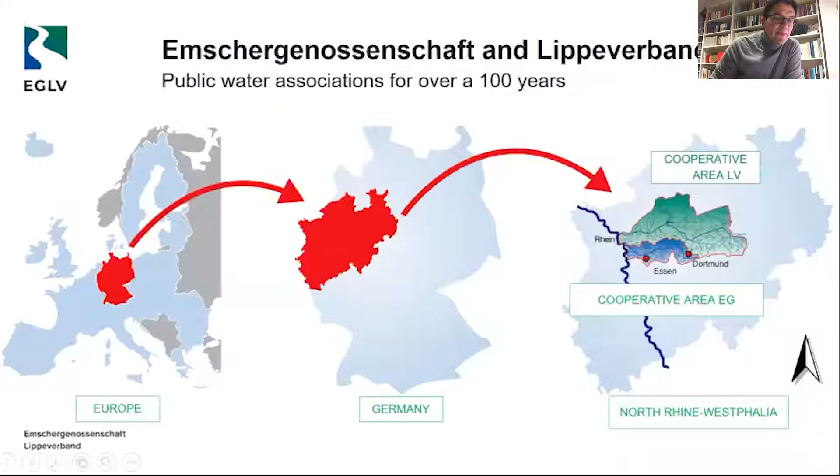If you put up the next slide, please. Here you see the public water boards in North Rhine-Westphalia, where industrial companies, mining companies, and the cities are members, which is quite unusual. Next slide, here you see our catchment area.

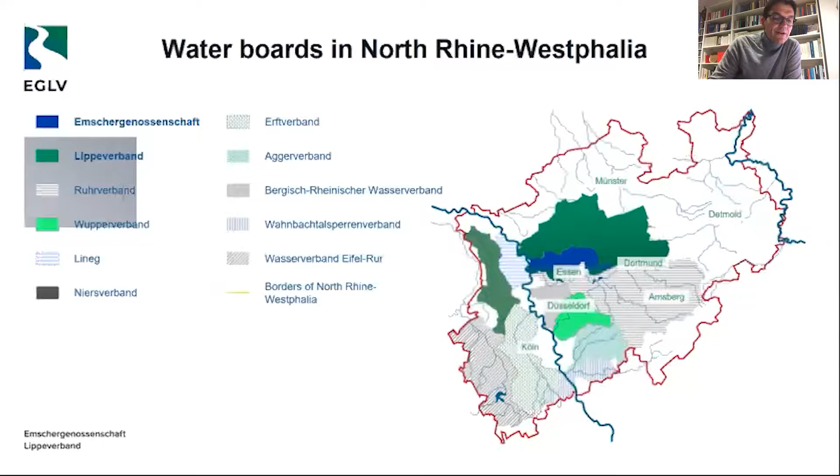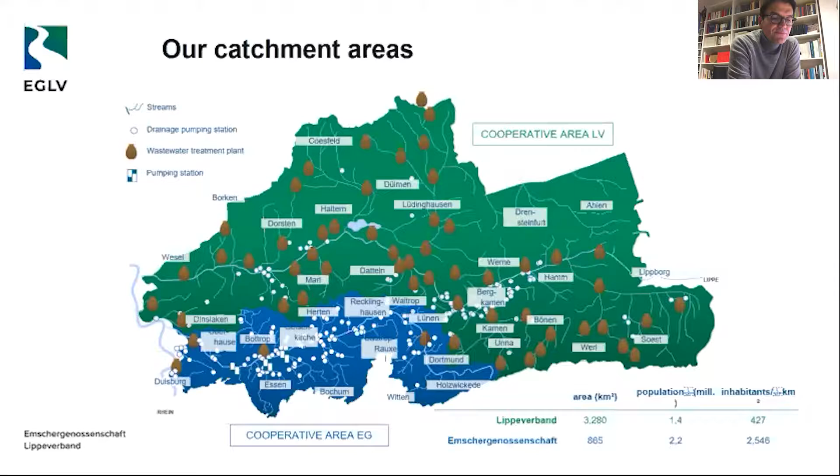We are taking care of 4,000 square kilometers. And we're doing it with a cooperative idea, which was founded in the 19th century. Next slide. And this is a kind of democracy bottom-up. We are founded by the principles of self-help, self-administration, self-organization to ensure the freedom of our lives here.

Very briefly, some economic key figures of what we are doing. We have an annual turnover of more than 500 million euro, a total balance of 6 billion euro. And we are a non-profit organization, a public water board, nowadays with 1,800 employees. Next slide.

And the very next slide, there you can see our task, what we are doing, and we're doing the water management around the water cycle. That means, on the next slide please, we try to maintain the river. We're doing renaturation, we're doing polder management, groundwater management, wastewater treatment, flood protection, waste disposal, stormwater management, climate change adaptation. We're doing everything around the water cycle. This is a wide range of tasks based on the resource of water.

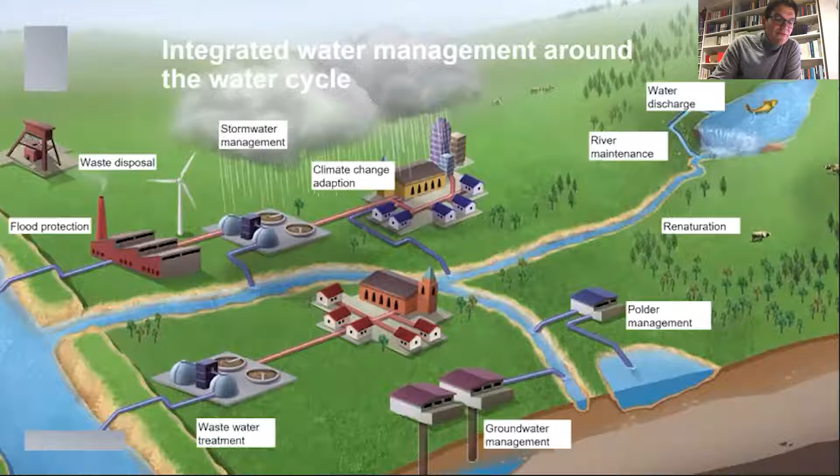Very briefly look back in the past on the next slide. Our river was in former times around 1800 with a great fish fauna documented in historical records, before the industrialization. The river was used for fishing and working with mills, but it didn't work very well.

And then with the upcoming industrialization in the 19th century, next slide please, the economy boomed, mainly mining and steel industry. A lot of people coming to our region. We have more than 2 million people coming here looking for work. And of course, we do not have all the logistics for those people. Next slide. There you can see what is going on.

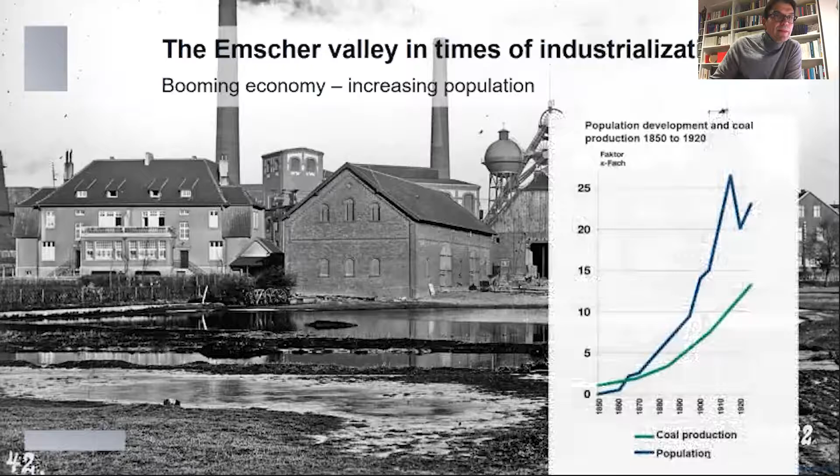The development of our river during the 1850s to 1890s into a densely populated industrial area led to an enormous increase in the quantity of wastewater. Additionally, mining subsidence resulted in disturbances of wastewater drainage. This caused a drainage emergency, and actions were needed.

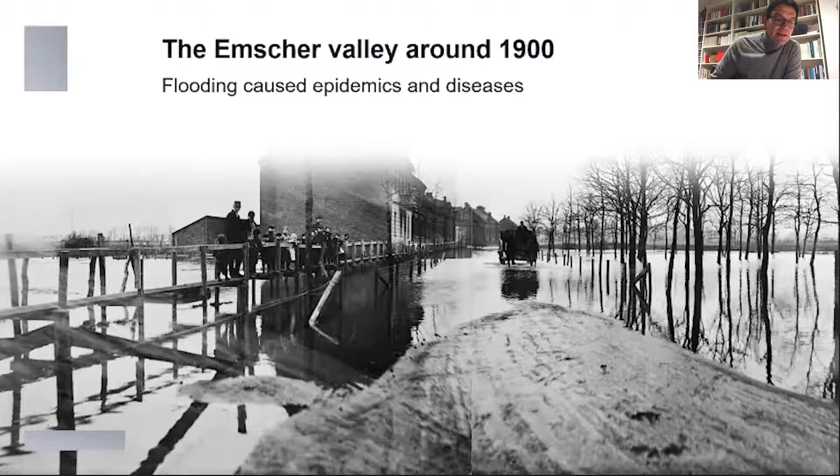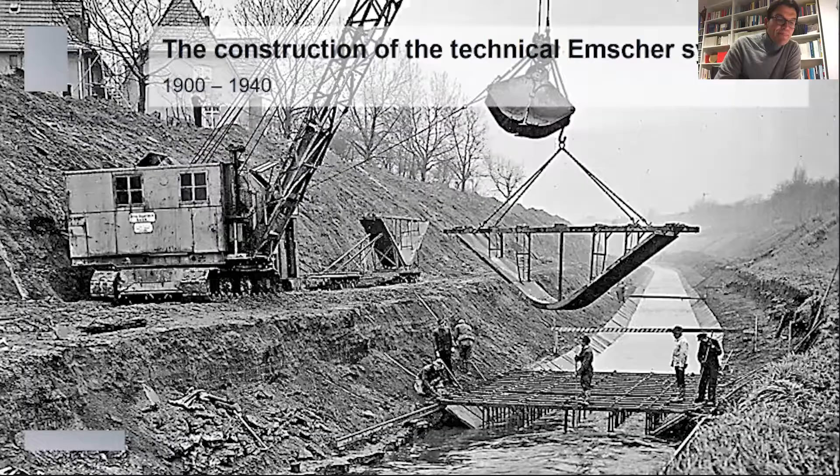As a reaction to the severe situation, our Public Water Board was founded in 1899. The big plan was the straightening, deepening, and diking of the river. The Emscher, and also the corresponding streams, were regulated and concreted. Construction of an underground sewer was impossible due to coal mining and mining subsidence. Back then, regulation of the river was the best solution, and it worked for years and years.

Here you see very iconic pictures of the old Emscher system, with the main purpose being transport of wastewater, open air as you can see. It was very efficient, but of course not sustainable for men and nature.

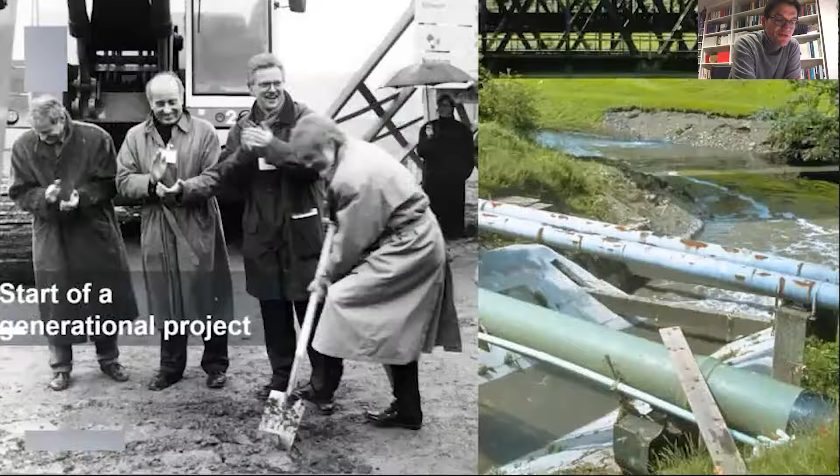So some 30 years ago, the generational project started: the reconstruction of the Emscher began. And this project now comes to an end.

With a budget of more than 5 billion euros, we constructed 436 kilometers of sewers. We renatured about 340 kilometers of waterways, built bike paths, and 4 big wastewater treatment plants. This is really one of the biggest infrastructural projects in Germany and in Europe.

In terms of its impact on the region, the Emscher conversion is invaluable. It is an important milestone in the development from a coal and steel region to the greenest industrial region in the world, and is a role model for the further course of the social-ecological transformation of our region.

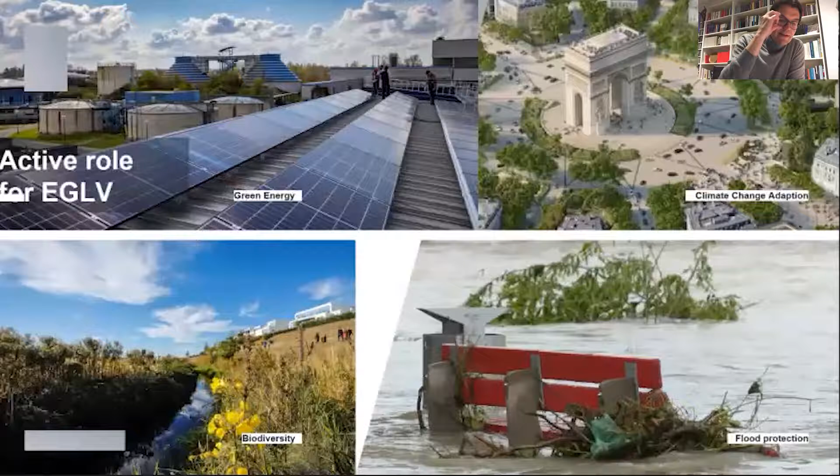So this means, for us as a whole, and the whole water sector, as a pillar of public services and an anchor of stability and trust for citizens, we are now, because of our attribution of competence, going to act.

The water sector bears a double responsibility for climate change. As an energy-intensive sector, it itself emits large quantities of CO2. This gives rise to the task of participating in the energy turnaround and producing as much green energy as possible itself. For example, our wastewater treatment plants are now about 80% energy autark.

At the same time, water plays a central role in coping with the consequences of climate change. Adaptation strategies must be integrative and implemented accordingly. This means urban planning and infrastructure construction must be done jointly with the water sector in the future to jointly develop the capacity to cope with extreme weather events.

A key role in adapting cities to climate change is improving the ecological status of water bodies. It helps increase protection against flooding and has significant positive effects on the quality of life of citizens in times of climate change. Within our water sector activities, we are the most important active environmental protector in Germany. Increasing ecological demands of our population must of course be reflected in our work and fundamentally strengthen the interests of the water sector.

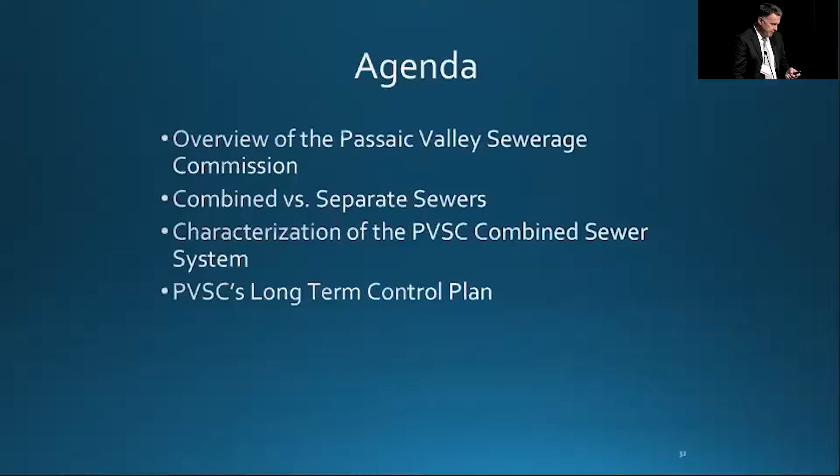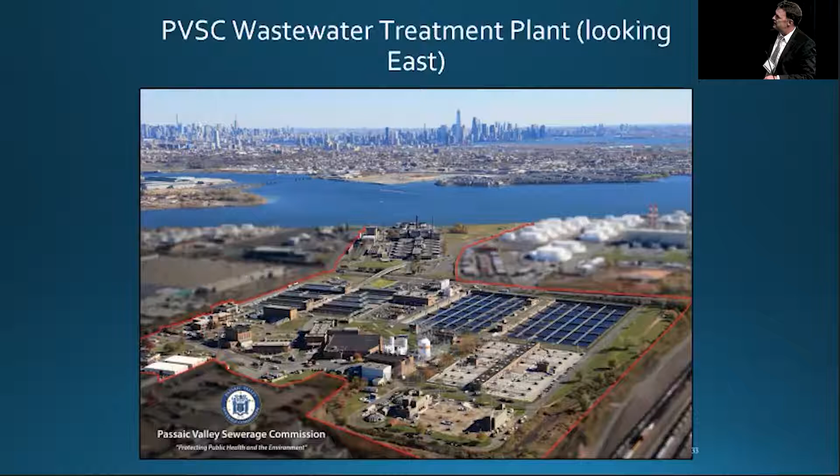The Passaic Valley Sewerage Commission is located on Newark Bay in the Ironbound section of Newark. You can see the New York City skyline in the distance. We have two areas of our treatment plant: what we call the wet train and then the sludge train. It's approximately 140 acres.

The Passaic Valley Sewerage Commission was formed in 1902 to protect the water bodies of the Hudson and the Passaic rivers. Our treatment facility is located on Newark Bay in the Ironbound section of Newark. We're the largest wastewater treatment facility in the state of New Jersey and the 5th largest in the country. We serve 48 municipalities in North Jersey and parts of Bergen, Essex, Hudson, Passaic, and Union counties. We serve approximately 1.5 million residents, and we have 182 industrial discharges to our collection system.

Not only do we receive waste through our sewers, we also have a robust liquid waste acceptance program where we accept non-hazardous liquids via trucked-in and barged-in locations. We accept approximately 350 trucks a day at 3 different discharge locations throughout our treatment facilities. Depending on what they're bringing in is where we direct them to discharge within our treatment plant.

We also accept sludges and leachate via barges. We take in approximately 20% of all New York City DEP sludges. We also accept all the sludges from Bergen County Utilities Authority, Linden Roselle Sewerage Authority, and the Passaic Valley Water Commission, which is a water treatment sludge, not a wastewater sludge.

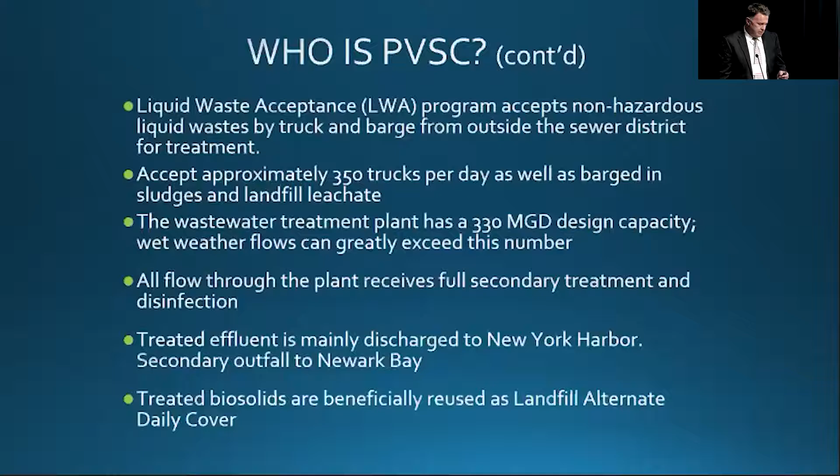I'm just going to give a little review of the 2 different types of sewers that are out there. There's a combined sewer, which means all flow, both storm and wastewater, go down one pipe. So your wastewater out of the buildings goes into the same pipe as what all the collection system is tying into. And then you have separate systems, with a separate line for sewage and a separate line for stormwater.

During dry weather events, pretty much all flow that is generated ends up going to the wastewater treatment facility.

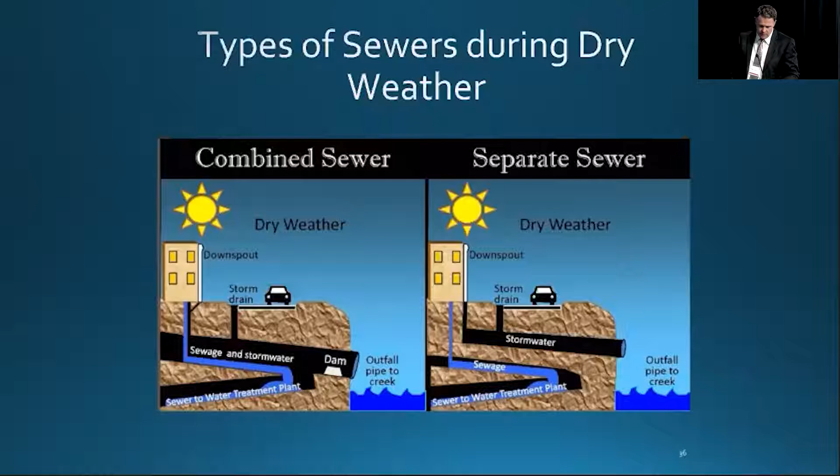During a wet weather event, wastewater is still going down the same pipe. Storm drains, though, now all the stormwater is being collected. Any downspouts that are connected to that line all discharge into this common line. When this line becomes surcharged, or the wastewater treatment plant can't handle any more flow, it'll back up and discharge out through a discharge to a creek, river, or whatever it may be.

Whereas with a separate system, the sewage continues to go down the way it was going to the wastewater plant, and stormwater is now directed to the river. So it's separated. You do get impacted during wet weather via inflow and infiltration, but it's much worse when you have a combined system.

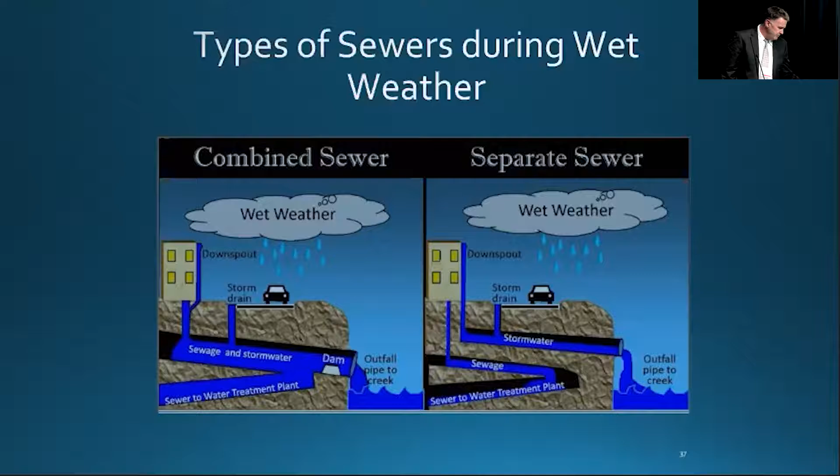The characteristics of our system: we have a main interceptor sewer that brings the flow to our plant. It's 22 miles long. It starts up in the very north end of our sewer district and works its way down. We have a south side interceptor that comes in and brings flow from Newark and portions of Union County. And then we have our Hudson County force main, which comes in across Newark Bay into the treatment plant and comes in just upstream of our primary clarifiers. This is picking up the flow from Jersey City, Bayonne, and North Bergen.

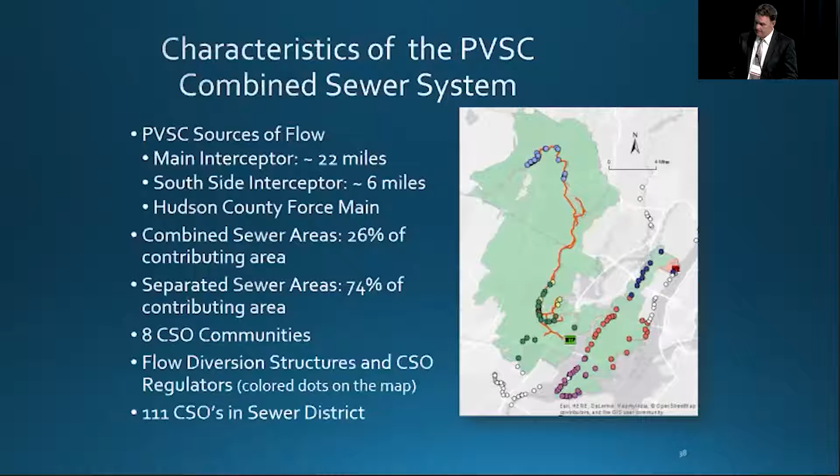Out of our sewer district, 26% of the area is combined sewers, and the balance, or 74%, is separate sewers. We have 8 CSO communities throughout our sewer district, and our collection system consists of a bunch of flow diversion structures and CSO regulators, which are shown throughout. There are 111 combined sewer overflows in our sewer district. We do not own any of them; they're all owned by our 8 CSO communities.

The New Jersey DEP, as part of our NJPDES permit, or the New Jersey Pollutant Discharge Elimination System permit, requires PVSC and all CSO communities to develop long-term control plans for addressing these combined sewer overflows. These were developed to identify cost-effective solutions to the combined sewer overflows and to reduce pollution, and require an implementation schedule for these long-term control plans.

The long-term control plan goal is to capture 85% of all combined sewage collected during precipitation events. We worked with our 8 CSO communities in developing these long-term control plans, using 2 different approaches. There's a regional approach, where all 8 communities collectively would achieve the 85% capture. And the municipal approach, where they would all just go about it on their own, doing improvements in their system to meet the 85% capture.

The main difference between the two is the regional approach included a parallel interceptor that would convey the majority of the flow from the city of Newark to our treatment plant. The way that benefited was that infrastructure didn't have to be built out elsewhere in the sewer district.

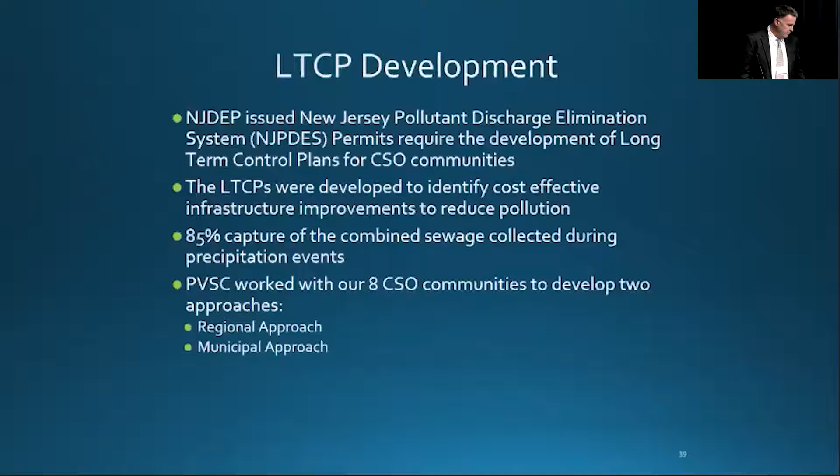So the selected alternative was the regional approach. As I mentioned, the main difference was the parallel interceptor and less infrastructure out into the sewer districts.

Officially, the long-term control plan took 5 years to develop. It was originally supposed to be submitted June 1st, 2020, but due to the pandemic was delayed till October 1st, 2020. We received comments from the DEP in June, addressed them, and resubmitted our plans in August of 2021. Once the long-term control plans are finally accepted, it's going to take 30 to 40 years to implement all the improvements in these communities, with an estimated cost between 1.3 and 1.8 billion dollars when all is said and done.

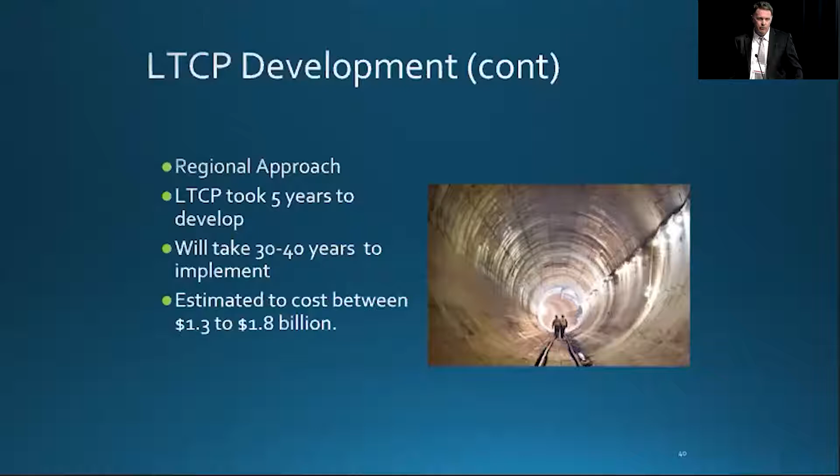Some of the infrastructure being put in these CSO communities and at the Passaic Valley Sewerage Commission is green infrastructure. Rain gardens is one technology being used. Sewer separation, where we separate combined sewers into separate sanitary and storm sewers. Storage tanks out in the system collect and store the flow, and when it subsides within the interceptor, you bleed it back in.

Regulator modifications and repairs to the regulators are out there, adding relief sewers, a secondary bypass at the Passaic Valley Sewerage Commission, which I'll talk about in a minute, and a parallel interceptor - a 5.5-mile pipeline that would convey more flow to our facility for treatment.

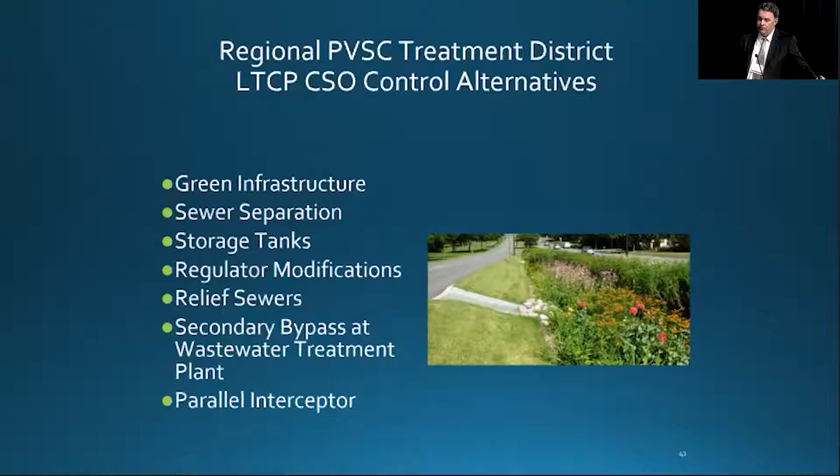So PVSC's contribution to the long-term control plan is we're building a bypass facility at our wastewater treatment facility. Currently we have a secondary treatment capacity of 400 MGD. This facility will allow us to treat up to 720 million gallons per day. All flow will go through our preliminary and primary treatment.

After primary treatment, 400 million gallons will go to secondary treatment, and the balance, or 320 million gallons, will bypass secondary treatment and be blended back in with the secondary effluent, disinfected, and then discharged to both New York Harbor and Newark Bay. Any flow going to Newark Bay will receive dechlorination treatment via sodium bisulfite.

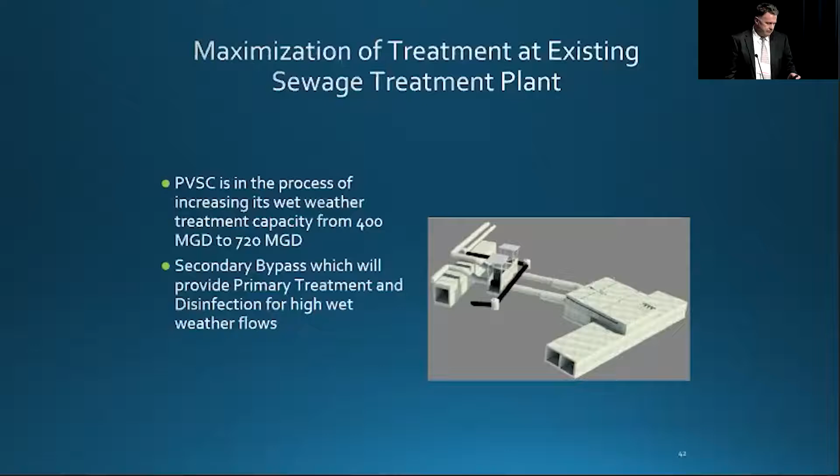So when these programs are implemented, right now we're seeing 69% capture in our system. Within the first 5 years, we're going to see 72% capture of CSOs with some of the infrastructure. The next 5 years, we'll go from 72 to 77% capture, mainly due to the construction of our bypass facility.

In the first 20 years, which would include the construction of our parallel interceptor, we're going to see a total reduction of 1.7 billion gallons of CSO overflows addressed, and we'll be receiving 80%, actually more like 82% capture within the first 20 years.

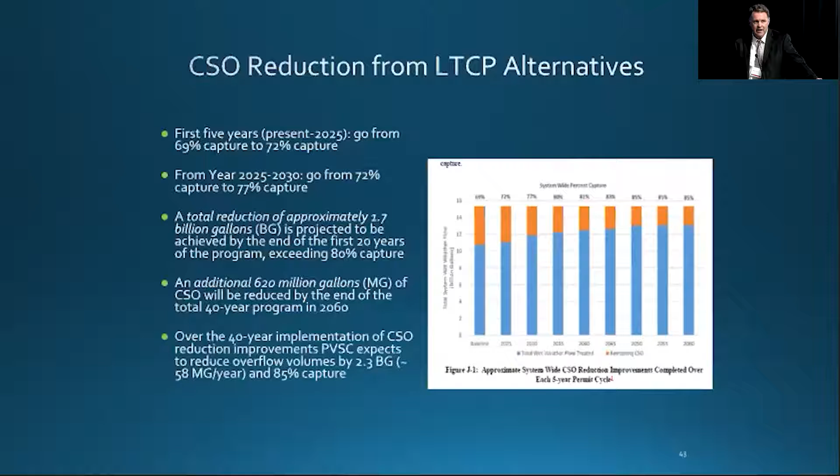Following the subsequent 20 years, we'll be collecting another 620 million gallons of CSO overflow. When all is said and done, after the 40 years of improvement, we're going to see 2.3 billion gallons of CSO addressed, with an average of approximately 58 million gallons per year.

That's it. Thank you.

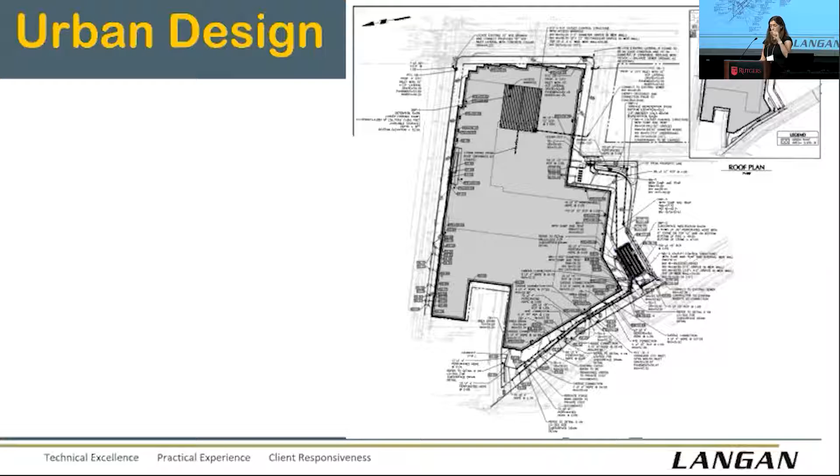Cramming in little types of green infrastructure in the site in all different places. The property line of this site, or the building, took up about 95% of our property line.

But in Philadelphia, they want you to manage every square foot of impervious area. The requirement is to treat 1.5 inches over every square foot of impervious area. So it becomes difficult as a designer—you can see around the perimeter, you may have like a set of stairs or just a little ledge off your doorway.

And you were like, well, that's bypass, but they want us to treat every square foot.

So we've done even pervious stairs, or concrete stairs that slope back, and then we have a little trench drain to pick it up, and every little square foot is managed. And that's how we met these requirements for water quality, flood control, and channel protection.

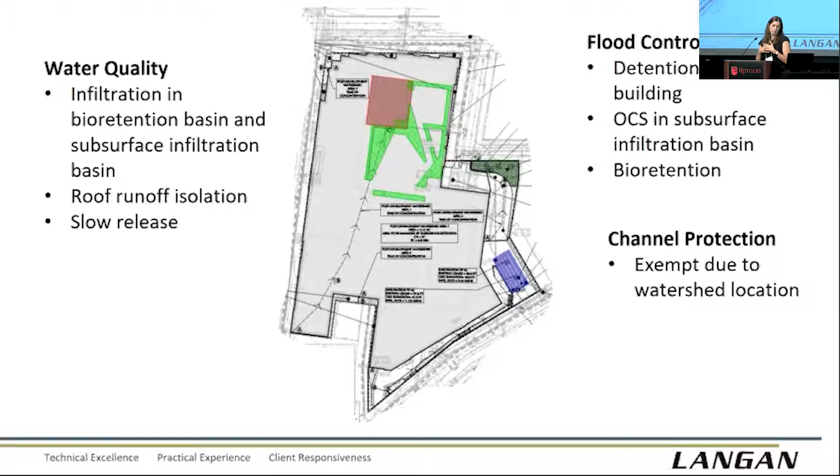Another example, something we did years ago, but it's more in line with treat small, treat frequently, don't do a big basin. This is the existing Christiana Mall in Delaware. As you can see, it's a sea of asphalt. We did a retrofit, like a facelift, adding some restaurants around the perimeter with minimal regrading. We wanted to really limit our earth disturbance, so the requirement was to treat 1 inch over any area that was a change of use. Not that strict of a requirement.

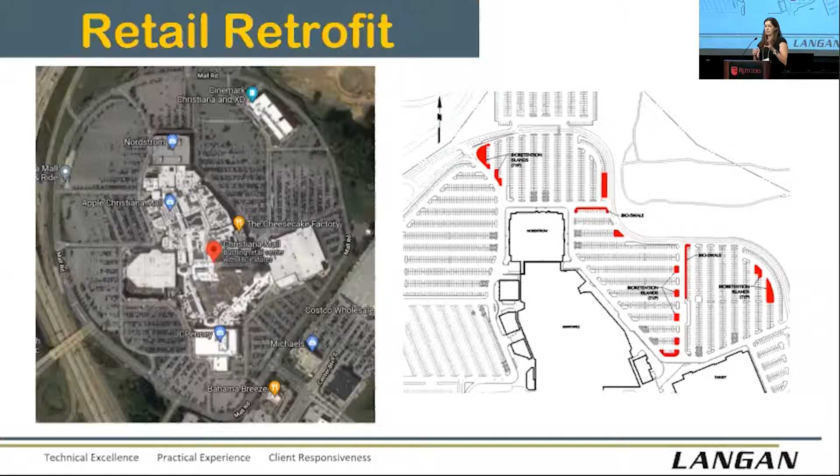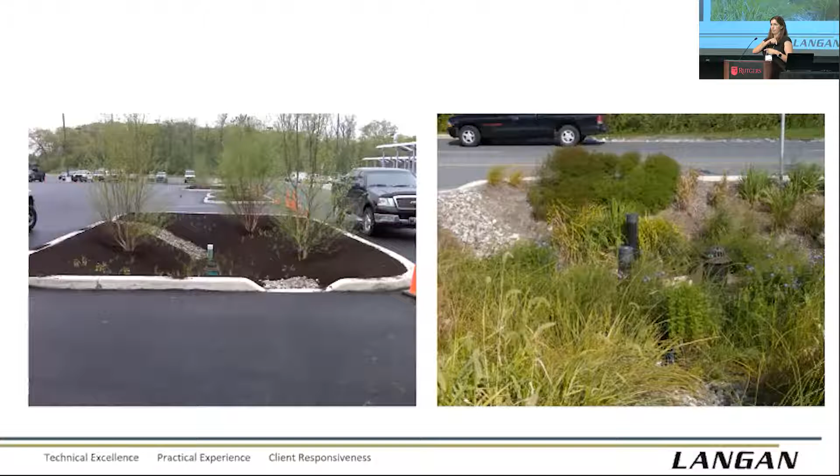You're stuck to the geometry of that island, so if you're getting too much, you shift the curb cut so you don't get as much. We did these throughout the mall, and that's a picture of the bioswale. They trimmed those overflow risers back.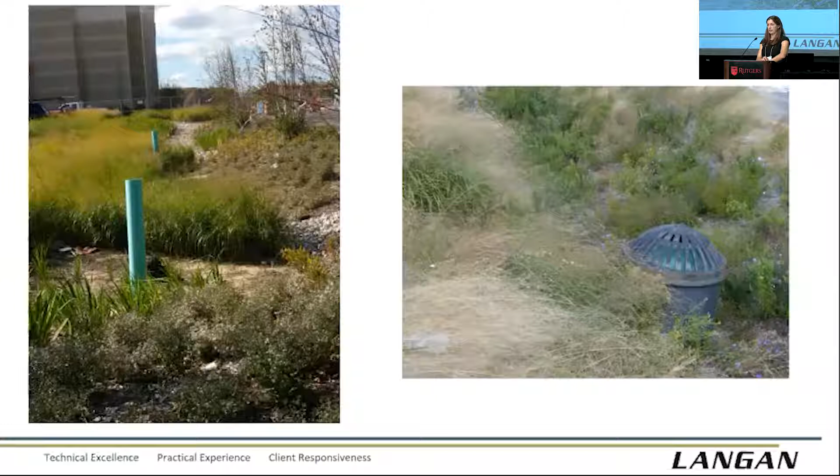Langan and my company - I didn't work on these next two projects, but I think they're very interesting, and I think they're where we're headed for stormwater. This was in New Jersey. They used this product called Cupolex, which is like a plastic little dome, and it works in concert with concrete on top. In this case, they provided this storage for stormwater management and additional storage for flooding, even preparing for more frequent storms with climate change. There's a number of products you can use for storage.

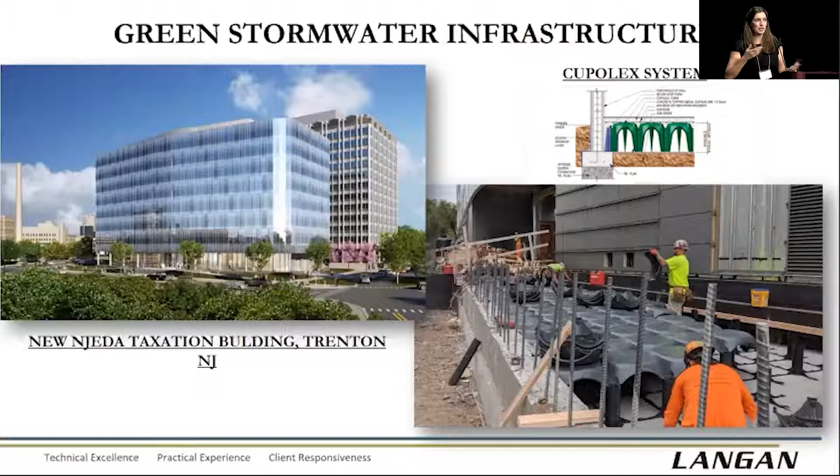I use crushed stone a lot with fabric and perforated pipe, but if you want more void space, on another project under the building we just used a concrete tank - 100% void space. This product has like 90-something percent void space, but they add that structural component with the concrete on top. I've worked with another - it's not a manufacturer, but it's a geostorage product, which I like because it has a concrete lid over stone gabions, and it provides this interior area that is 100% void space, because we're always looking for the most cost-effective storage solution. Then we start to look at the embodied carbon and which one is actually better for the environment.

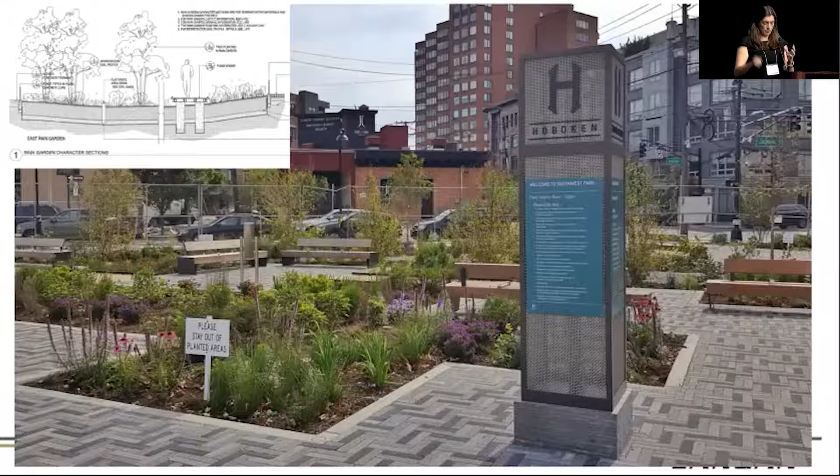This next project, or series of projects, I think is really more the wave of the future. The town of Hoboken, right next to Jersey City in New Jersey, has these parks, and we did bioretention in there with lightweight fill, and they got a lot of storage. There's actually a series of parks, which is interesting, but the most notable thing is the outlet control structures are tied to an OptiNimbus device - a company that makes this - and it works in concert with the cloud and NOAA rainfall data, and will only discharge water from the stormwater BMP when it tries to optimize, like waiting until the BMP is completely at capacity and then discharging it, or if it's not, holding it back while the storm is still going on.

And with one of these, they've already seen improvements in their localized flooding. I think they have 3 of them now in the city of Hoboken, but you can see adding multiples of those throughout the city in an area that really is prone to flooding. They're going to start to really get some benefit and have some control over when stormwater is released. Because a lot of the areas we work in have combined sewers, and every overflow we have is not good.

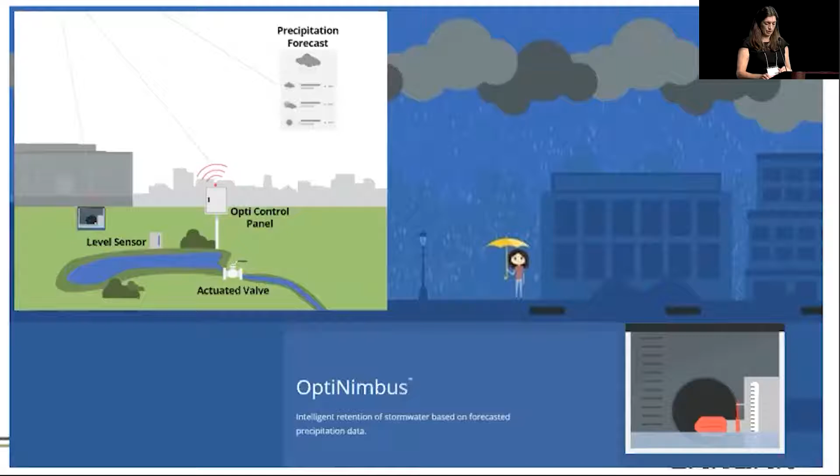So stormwater management is part of the solution. I think you need to do your part on your site, but the next evolution is incorporating storage for these larger storms. What is that going to look like? Who's going to pay for it? Where, how, and what material are we going to use? And how are we going to control what gets discharged at what time? These are things I'm interested in. We're definitely looking at a lot more. That's it, thanks.

Thank you, Carolyn, for a fascinating micro level view of this problem, and also a link back to the larger scale. That was great.

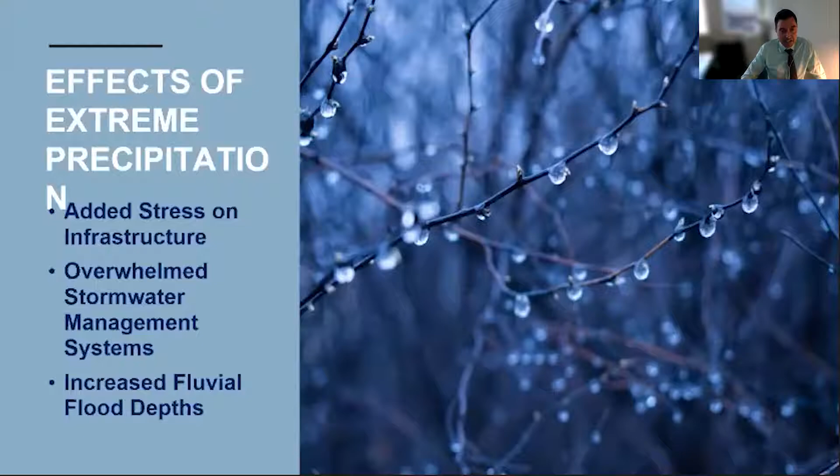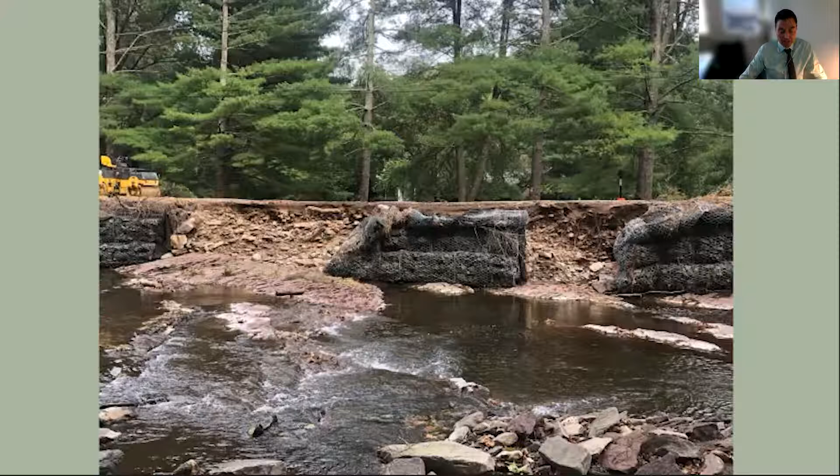So another final example: this is standing in the creek, looking at where the road was. You can see the retaining wall system, gabion baskets that were put in a few years back. They were not able to hold the road in place because the velocity was so high, and the scouring behind it was so great that the road collapsed. We're going to see this more and more, unfortunately, as we go.

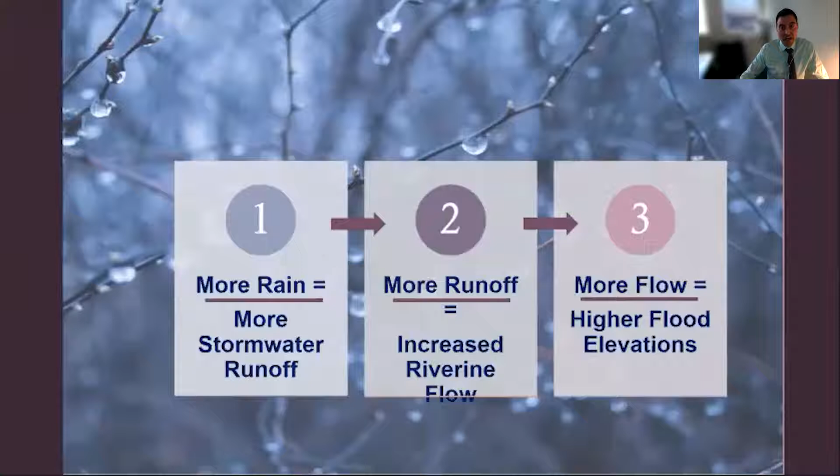The next slide shows the dynamic that's happening: more rain leads to more stormwater runoff, and more runoff means increased riverine flows, and more flows in our rivers mean higher flood elevations.

So how do we address this increased stormwater runoff? Our stormwater management regulations in the state have rate reduction factors for the 2, 10, and 100-year storm, based on precipitation published by NOAA, which is based on data from past years. So even if you design a system able to convey the storm flows anticipated for today's rain and bring it safely to a stream system or the ocean, there's no way it's going to be able to handle increased volumes.

So what does that look like then? Because the systems are designed for today's precipitation and not future conditions, we find that we're in a place where we need to change our regulations to adapt to that.

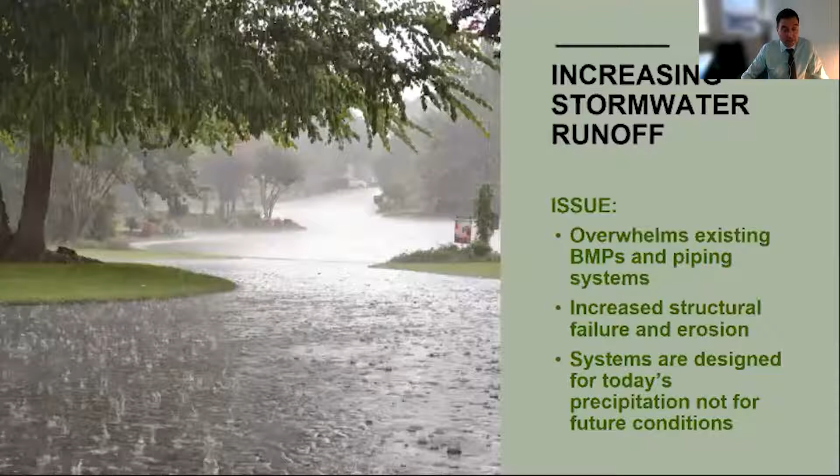So the response we're considering right now is to say that when storm sewer systems are being designed or BMPs are being sized, they should not only be designed with today's precipitation in mind, but for projected future precipitation. There have been a number of studies across the state projecting what rainfall increases could be by the end of the century, and some reports say the likely range of increase in precipitation in some counties could be as much as 50%. So having 50% more volume or intensity of runoff is an enormous threat to our infrastructure.

The flip side of this is that we could require tomorrow that all new development has no runoff. Let's say we changed the regulation to say: anything you build, you have to infiltrate it or boil it away—you can't add any water to the system. Well, because of all the existing development and existing storm sewer systems, and some areas that don't have storm sewer systems, like where I live, the runoff is uncontrolled. So all the regulations in the world aren't going to fix that.

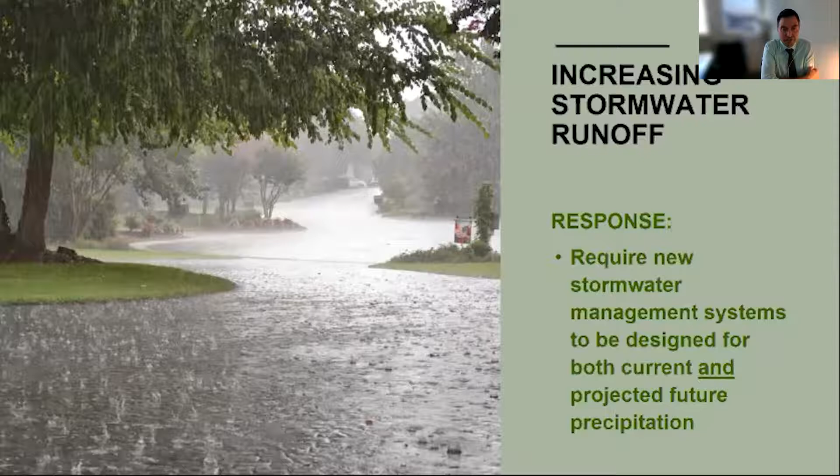So we're looking for ways that we can go back in and retrofit and modify existing systems so that they can convey the storm flows, so we can get water quality treatment that's meaningful, not just for today's conditions, but for tomorrow's.

So the obvious solution for proposed development, in our mind, is to have a design that looks forward to the anticipated precipitation that will occur. We can develop regulations saying a storm sewer system has to be designed for today's 2, 10, and 100-year storms and tomorrow's 2, 10, and 100-year storms, based on certain anticipated ranges. And of course there's always got to be room to adapt as science changes and the data gets more refined, which is also a challenge.

The other thing is, in our existing stormwater management regulations, the trigger for water quality treatment is adding a quarter acre of impervious surface or vehicular travel surface.

So you could have situations, and I've seen this many times as the review engineer at the state for projects, where you might have 100 acres of existing development being removed and replaced by 99 acres of development. So there's a net decrease in impervious surface, which is of course good. But there's no requirement to treat the water quality for that, and there's actually no requirement in a case like that to reduce the peak rates because the volume is being slightly reduced. So we're taking a look at that and seeing what makes sense.

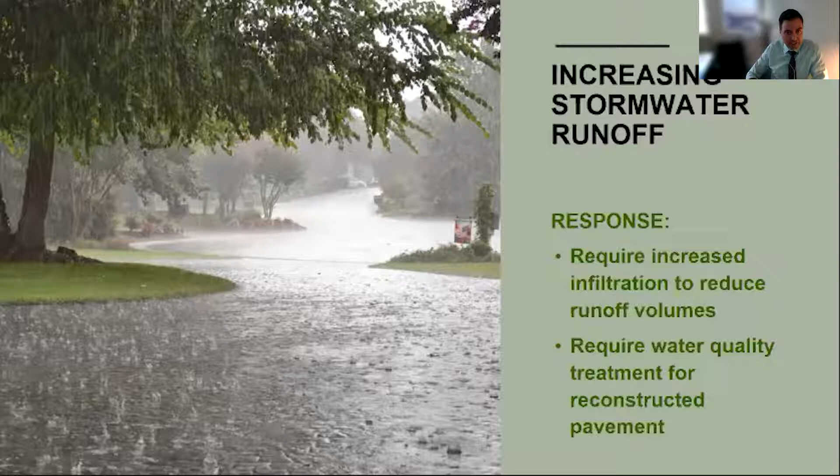Now, eventually all this runoff gets into riverine systems. And what we generally do in New Jersey, we either look at state DEP mapping of the floodplains or FEMA mapping. But some of these maps, like the state maps, are from the 1980s. They were based on hydrology that went back to the 50s, 60s, and 70s, and so they don't always reflect today's flood potential. And it's hard to know which maps deviate more than others, right?

After a flood event, we can calibrate it and say, we had this rainfall, we had this flow, this rainfall produced this flow, and therefore we can kind of calibrate and say, yeah, the existing mapping is relatively accurate, or it underestimates or overestimates. But absent that, there's really no way to calibrate it. And they certainly don't account for increasing precipitation because they're a snapshot in time.

So there's a cacophony of lines here, but really what this is showing you is that the blue area is the 100-year event. And the black and white line that you can see sort of outside of that is our New Jersey flood hazard design flood. And that's based on a flood that is 25% more flow than a 100-year flood. And that was added back in 1974 by the state to state studies to account for the effects of future development on a watershed. So that predated our stormwater management regulations.

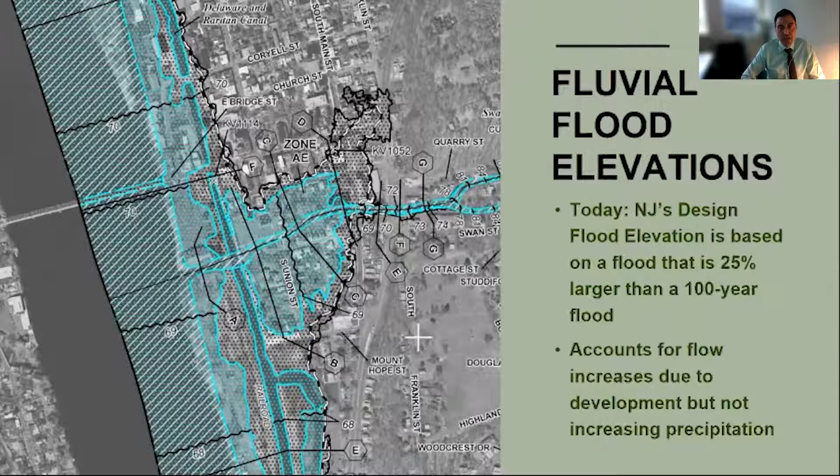So our NJ PACT, Protecting Against Climate Threats proposal, which we're working on right now, which would include the flood hazard rules, the freshwater wetlands rules, the coastal zone management rules, and then shortly to follow the stormwater management rules. The thinking and what we're developing right now are rules that would require buildings and infrastructure to be designed to future fluvial flood elevations. And so what that looks like is, and this is where it becomes very difficult.

We know that there's more rain coming. We know that more rain is going to produce more runoff, but it's not a direct relationship. 20% more rain does not equate to 20% more runoff. It might be more, it might be less, depending on the ground conditions and the systems that are in place. 20% more runoff does not equate to 20% more flow, peak flow, in a river, right?

Depending on the timing of it and the watershed size and a number of other factors, it could be more or less than that. And an increase of 20%, let's say, in a riverine system of flow does not equate to a 20% increase in flood elevations. So there are a lot of dynamics that are going on here hydrologically and hydraulically. But what we do know is that more rain means more flooding, and more flooding means that people that are building to today's standards might not be protected fully for tomorrow's flood.

What we're finding is that new development, when you build higher and when you build in a more resilient manner, it actually saves money in the long run.

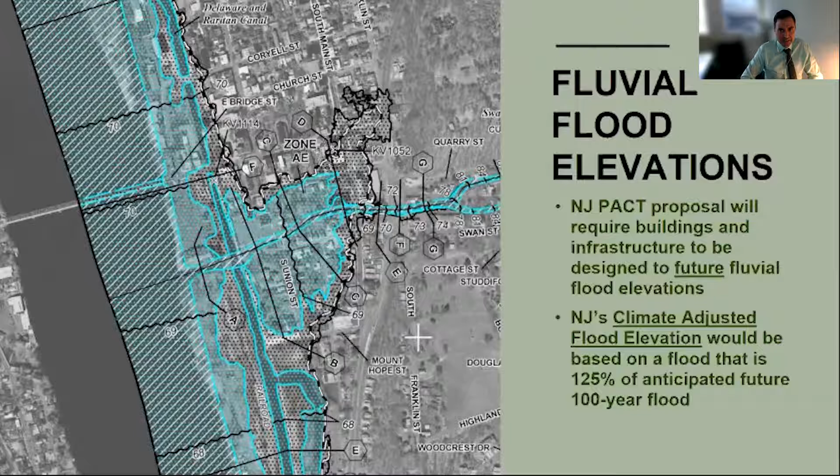Thank you. So if you're using today's flood elevation mapping, our design flood across the state is always about 1 foot higher than FEMA. Sometimes it's more, but it's always at least 1 foot higher than FEMA's BFE.

And the floor of your buildings and the surfaces of your roads, where possible, need to be elevated or flood-proofed up to 1 foot above that. You can go to the next slide, please, because that's actually where that's listed.

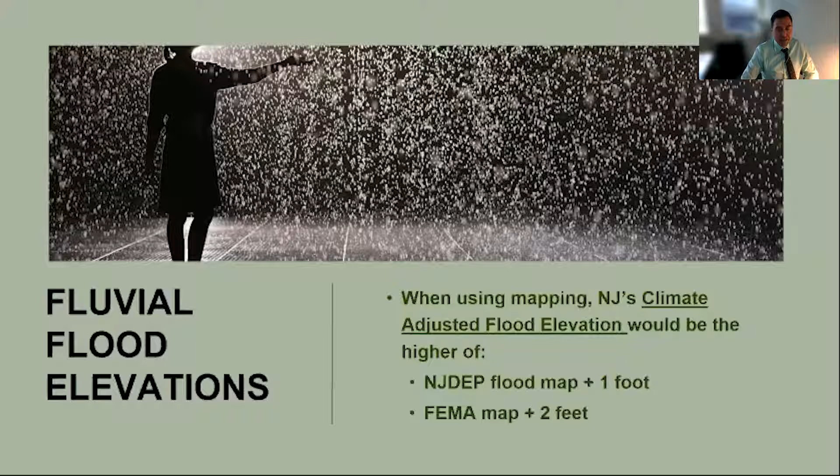So what ends up happening if we bump up the flood elevation 1 foot, and then we have 1 foot of freeboard on top of that, is the floor elevation of buildings would need to be either elevated or flood-resistant, up to 1 foot above that climate-adjusted flood elevation, which would be roughly about 3 feet above the base flood elevation.

And obviously, that's for riverine systems. Along the coastal systems where sea level rise is the dynamic, it's a different measurement. So that's really just a cross section of where we are.

We're in the process of fine tuning what the regulations look like. We're hoping that by the end of the year we would propose a comprehensive package that would include these and other changes. What would follow then is a comment period, 60-day comment period, and a response to comment.

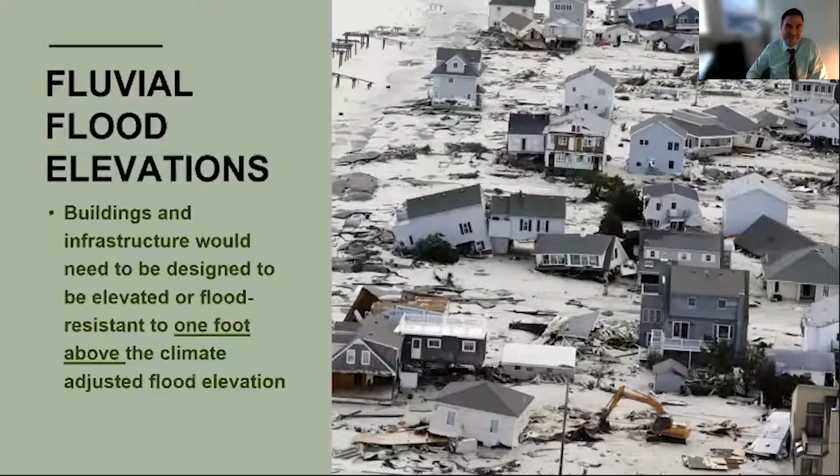Our vision is that by sometime in late 2022, we would have new regulations in place that would account for increases in precipitation. So that's my presentation. Thank you. Feel free to email me if you have any questions.